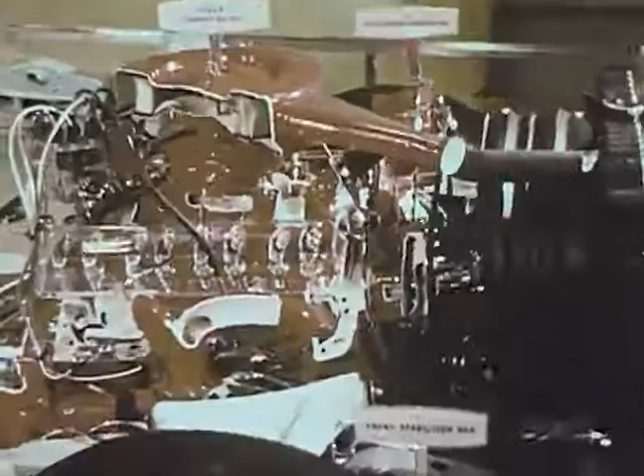Gasoline and air mixed together form an explosive mixture. The basic job of the engine is to convert this explosive energy into motion.

To contain the explosion, the engine uses a cylinder and, fitting snugly within the cylinder, a piston that slides up and down.

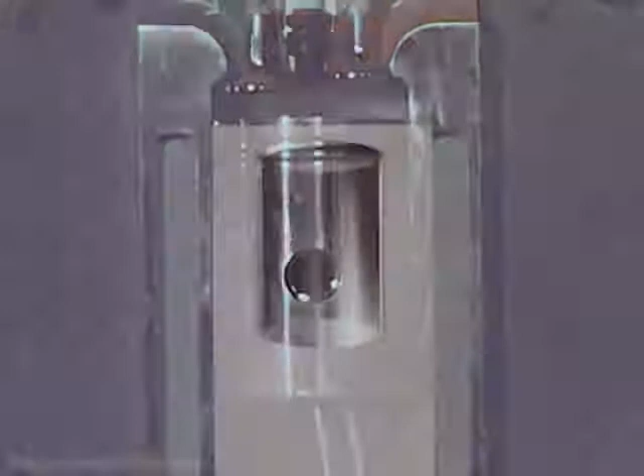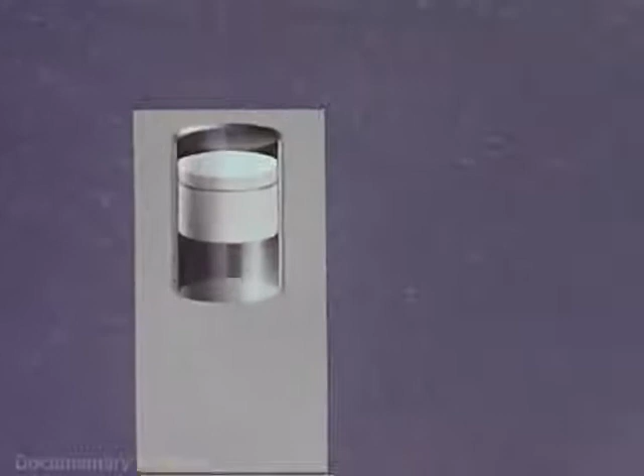Inside the cylinder, an electric spark ignites the compressed gasoline and air, and the hot gases from the explosion push the piston downward. The piston rod is connected to a crankshaft, which converts the up and down motion into rotary motion. The crankshaft then drives the rear wheels through various machinery, which we'll see later.

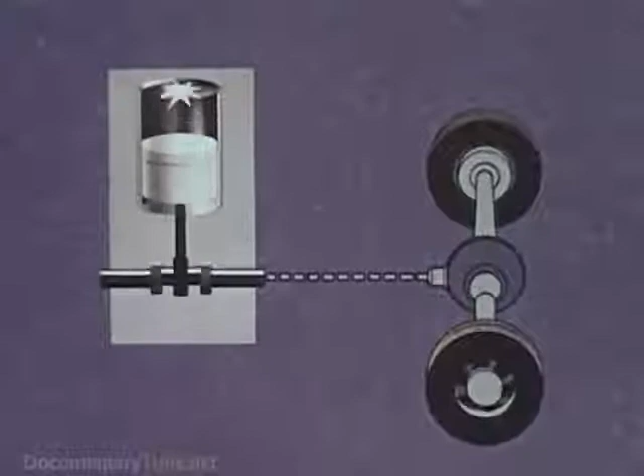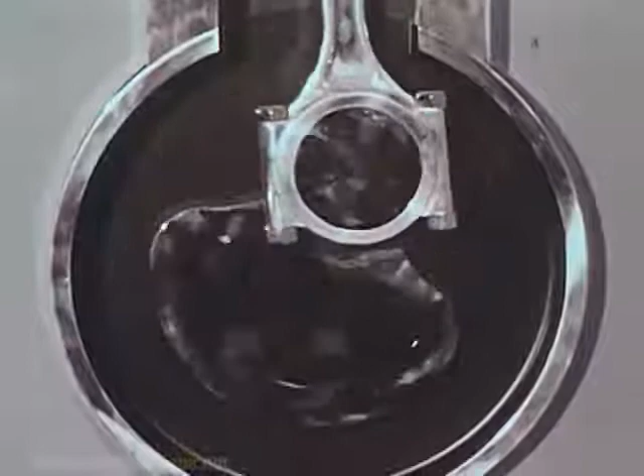Here is a different perspective on how the piston drives the crankshaft through the connecting rod. At the top of the cylinder are the valves, which let in the gasoline and air mixture.

For increased power and smoothness, modern auto engines have a number of cylinders driving one crankshaft.

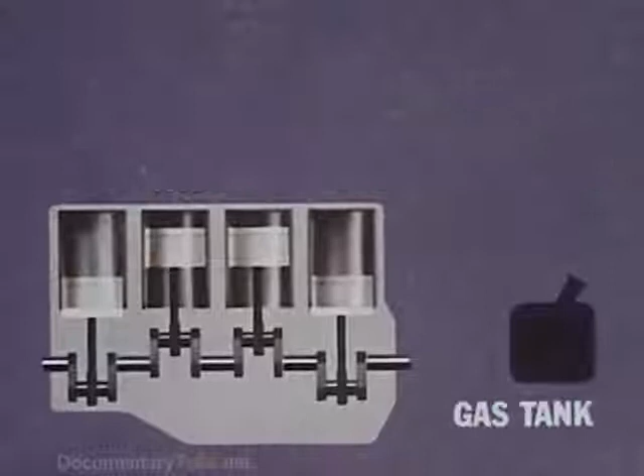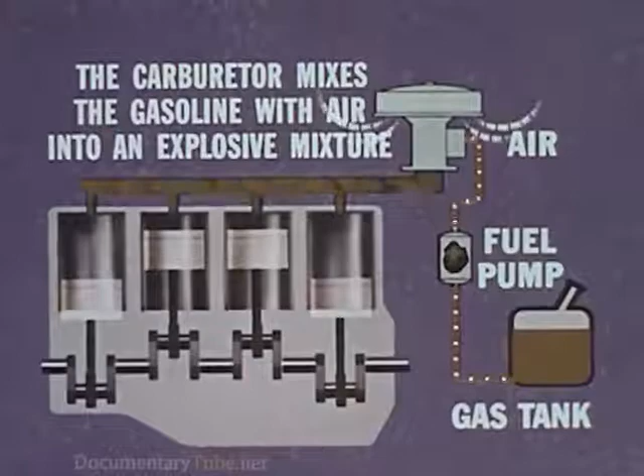Gasoline from the tank is pumped by the fuel pump to the engine's carburetor through the fuel lines. The carburetor mixes the gasoline with air to form the explosive mixture that drives the pistons.

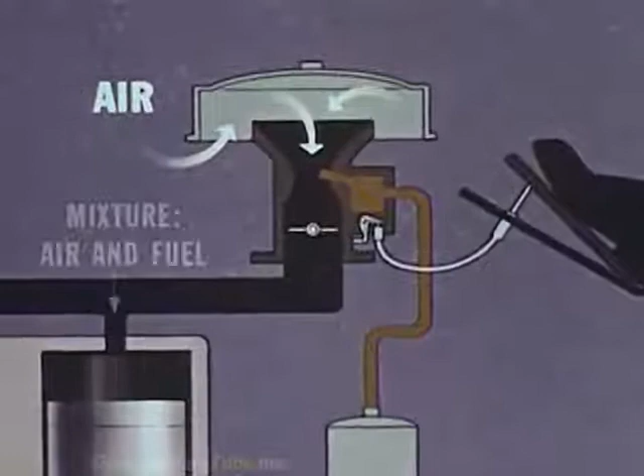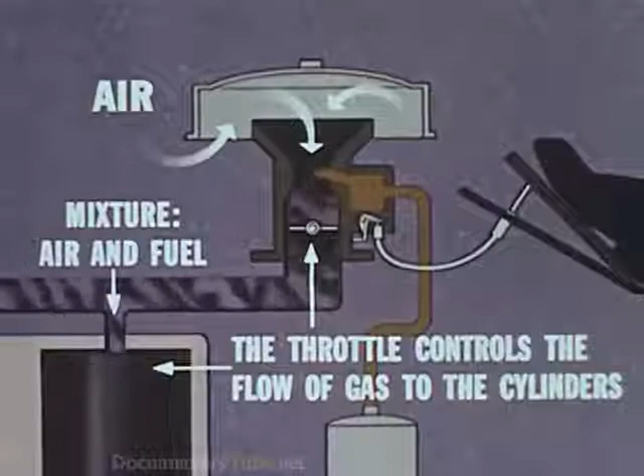Here's a closer view of the carburetor. A linkage connects the accelerator pedal with a valve in the carburetor. Stepping on the gas opens this valve wider, increasing the gas flow and speeding up the engine. Easing off on the pedal reduces the flow and the engine slows down.

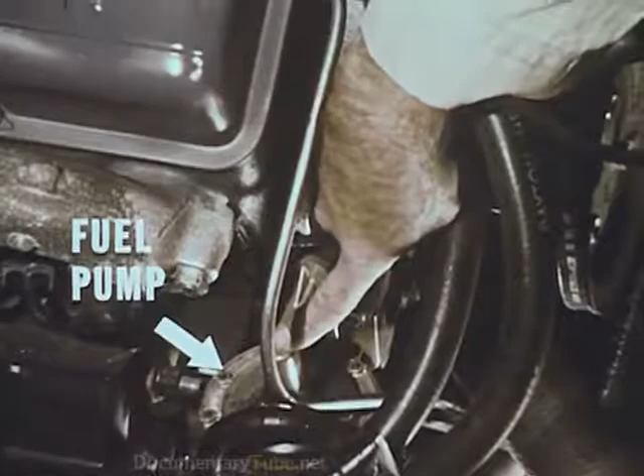Here on an actual engine are the counterparts of the fuel system just diagrammed: the fuel pump, the fuel line from pump to carburetor, and the carburetor itself with its air cleaner removed. Here is the linkage connecting the carburetor to the accelerator pedal.

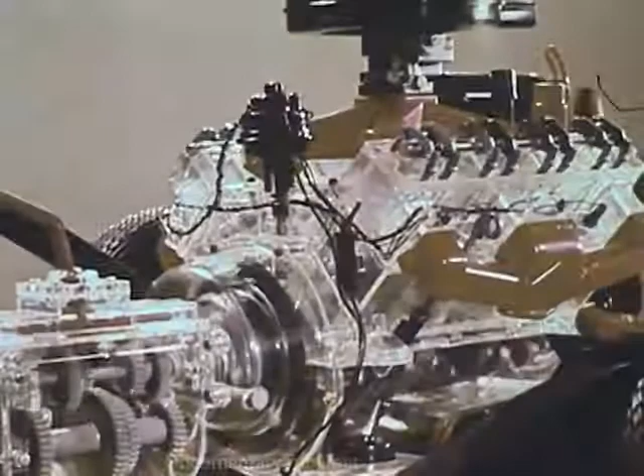The engine's electrical system supplies the spark that fires the fuel mixture. As the engine rotates, it drives a generator which keeps the car's battery charged.

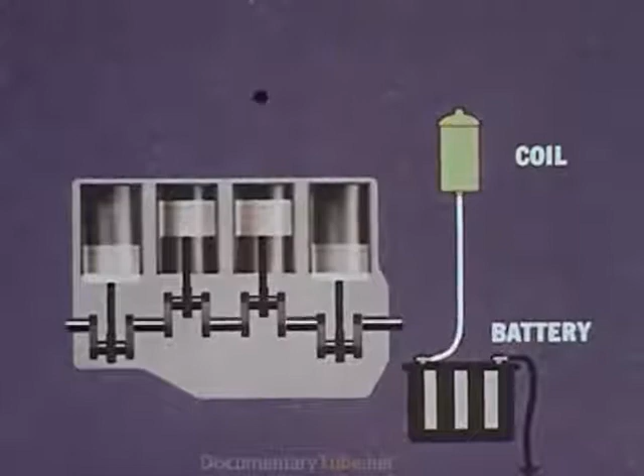The battery supplies electricity to the coil, which boosts the current to a voltage high enough to produce a spark, and then sends it through the distributor to the spark plugs located in the cylinders.

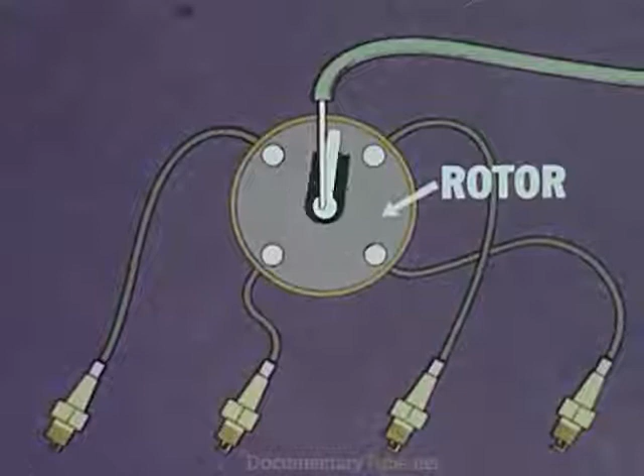The distributor distributes electrical current to the proper spark plug at the proper time. Inside the distributor is a rotor, which as it turns touches a series of contacts, one of which is wired to each spark plug. The points open and close as the rotor turns, interrupting the current to produce the fuel-igniting spark.

Here again are the major parts of the engine's electrical system: the generator, the battery, the booster coil, distributor, and spark plugs. Now looking at an actual engine, here is the generator and the battery.

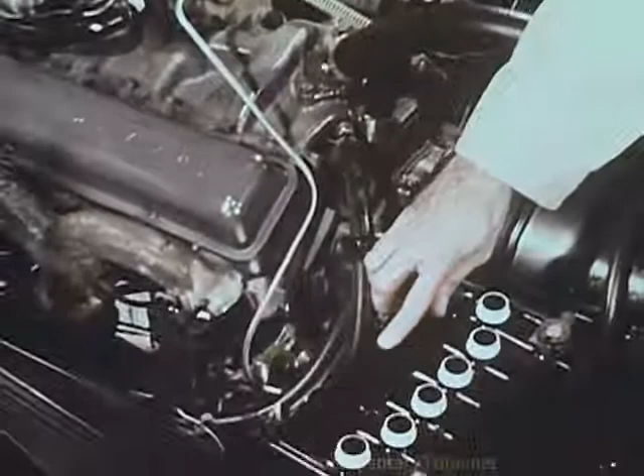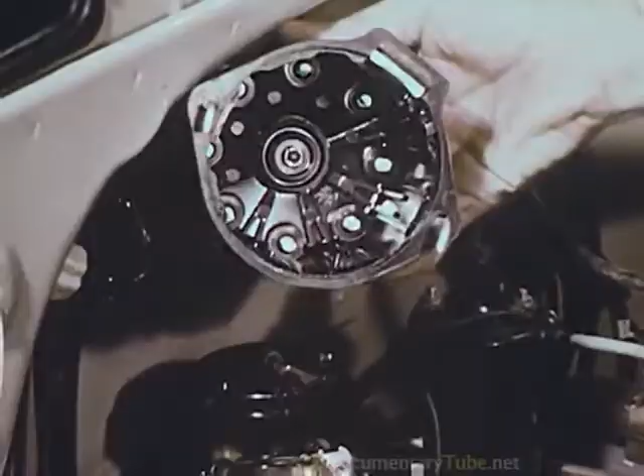Together at the rear of the engine are the coil, the distributor cap containing the contacts swept by the rotor itself, and the points, which sometimes need adjustments. And finally, in the cylinder heads, the spark plugs.

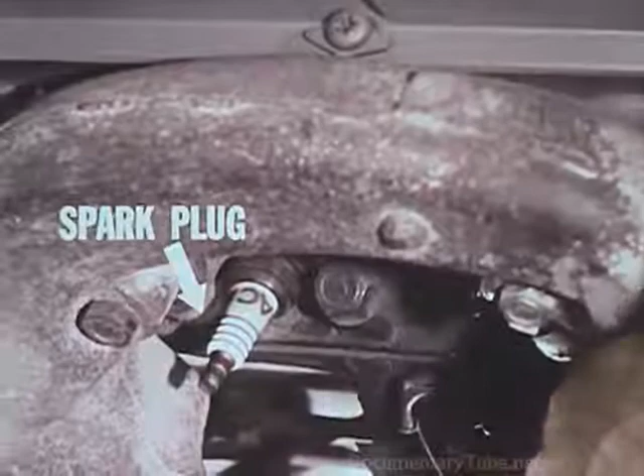The engine on this model chassis contains nearly all the parts found in a working engine. Let's break it down to its fundamentals and then build it up again.

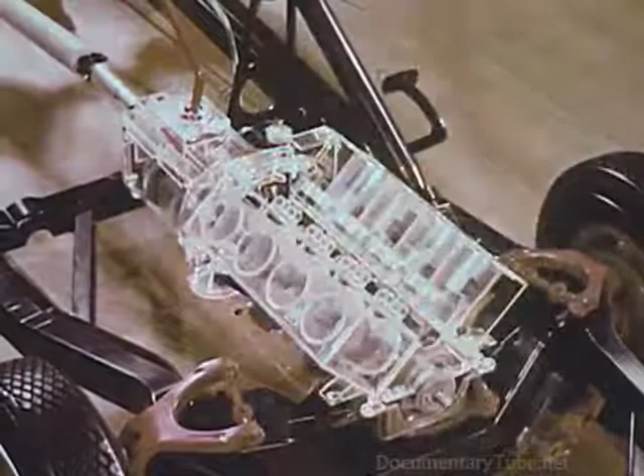Here's the heart of the engine, the cylinders and pistons. This engine, known as a V8, has two banks of 4 cylinders each, driving a common crankshaft.

The camshaft, geared to the crankshaft, lifts and lowers the valves in the cylinders. Now the right and left cylinder heads, containing the valves themselves and the valve lifters. The distributor at the rear of the engine is also driven from the camshaft.

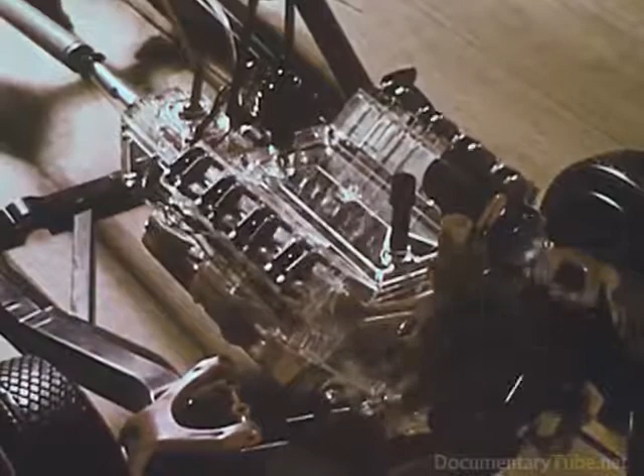Now the fan, the generator, and a part of the cooling system. Here, flashing lights simulate the firing of the spark plugs as the rotor supplies current to each in proper firing order.

Continuing the build-up, here are the carburetor and the manifold. And finally, the air cleaner atop the carburetor.

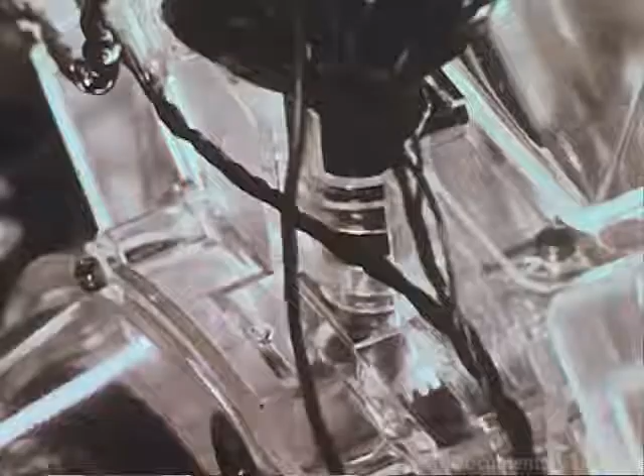Here is a rear view showing how the pistons drive the crankshaft. And down through the plastic housing, we can see the gearing connecting the camshaft to the distributor.

4, 6, and 8-cylinder engines are standard today. This V8 configuration is very popular for its smoothness and power.